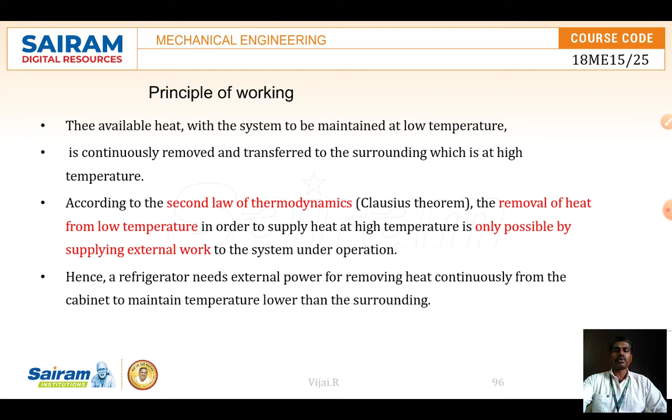So the refrigerator needs an external power for removing the heat continuously from the cabinet, and it maintains the temperature below that of the surrounding temperature. So this is how the refrigerator is functioning. In the refrigerator some important parts are there, the four important parts we know.

One is the compressor, which is used to compress the refrigerant, and then a condenser where the vapor is going to be condensed into liquid, and an expansion device where the pressure is going to be reduced, and an evaporator where the evaporation process takes place, that is, the liquid of the refrigerant is converted into vapor here.

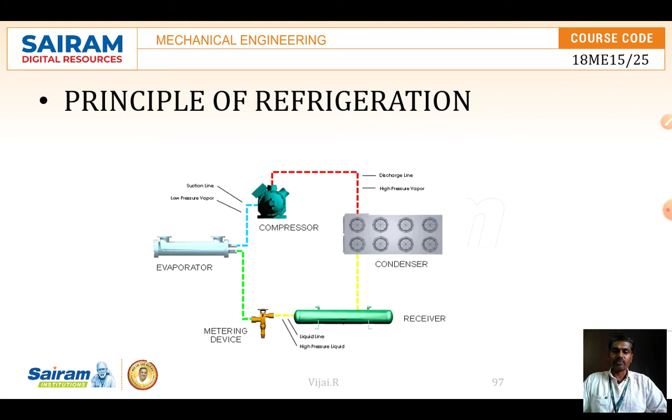So one by one we will see this process. We call it the vapor compression refrigerator. It's one type of refrigerator. How it is going to function, let me see. For this vapor compression refrigeration system, we have four important components. Number one is the throttle valve. We call it the expansion valve.

So throttle valve. Second one is the evaporator. Third one is the compressor. Fourth one is the condenser. So the first one, the throttle valve. In the throttle valve, the pressure reduction process takes place. So it is converted into a low pressure liquid.

In a throttle valve, the refrigerant is going to be converted into a low pressure, low temperature liquid. Once the low pressure, low temperature liquid comes, then it goes to the evaporator. In the evaporator, the low pressure, low temperature liquid passes through a set of coils.

When it passes through the system and through the coil, it absorbs the heat energy in the system, which is the refrigerator system, and it becomes vapor. So we call it the evaporator. The evaporator is the one where it is going to convert into a vapor. Then the vaporized refrigerant passes on to the compressor.

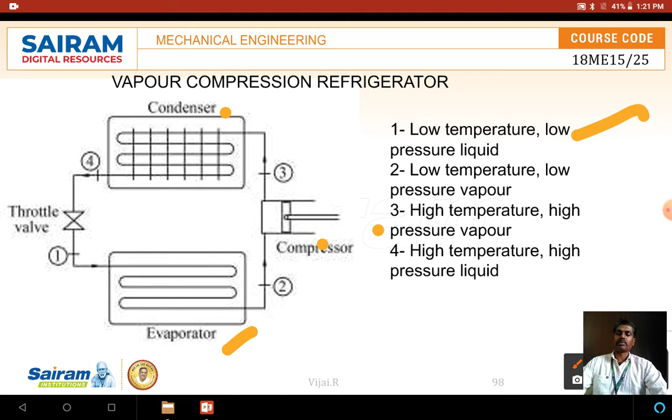The function of the condenser is to condense the vapor and convert it into a liquid refrigerant. So these four important things are there. How it is going to work, we will see in the next slide one by one: what is the use of the expansion valve, what is the use of the condenser, how the compressor works, and the function of everything.

So in this slide, we can see that a vapor compression refrigerator has mainly four components: evaporator, compressor, condenser, and the throttle valve. So the evaporator has a low temperature liquid. The evaporator is the area where we keep the materials, as in the fridge, and there a coil is passing. Through the coil, the low temperature, low pressure liquid is passing into the refrigerator chamber.

So when it passes through the chamber, through the set of coils, it absorbs whatever heat is inside the chamber, okay, and it takes the heat and changes into vapor. So the evaporator is used to evaporate the liquid refrigerant. So while coming out of the evaporator, it becomes low pressure, low temperature vapor.

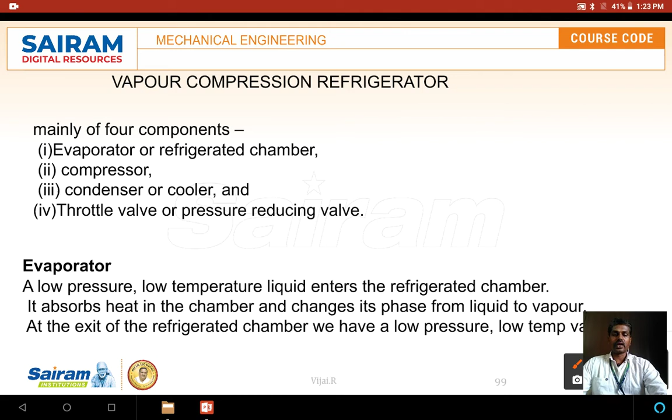Right. Next, the compression process. You can see what is happening in the compression. In the compression process, the low pressure vapor coming out of the evaporator goes to the compressor, where it gets compressed. Since the refrigerant vapor is now in the gaseous state, it goes into the compressor. In the compressor, compression takes place, raising the temperature and pressure.

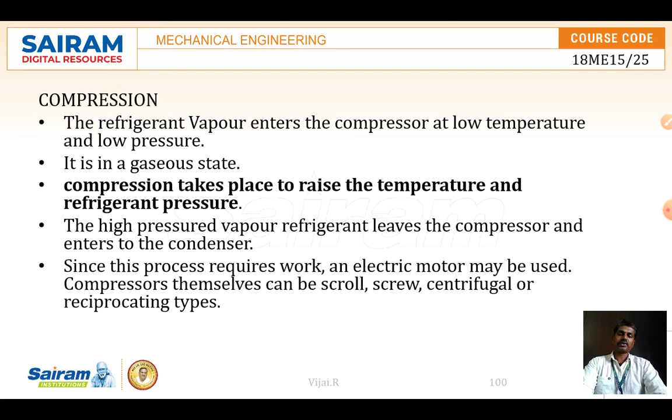So this high pressure vapor then leaves the compressor. It enters as a low pressure vapor, and after compression, it becomes a high pressure vapor and leaves the compressor chamber. For compression, we need to connect an electric motor, so that it will be useful for the compression.

Then it goes to the condensation chamber, where condensation takes place, that is, the refrigerant releases its heat to the outside environment. Once it loses all the heat to the atmosphere, it changes phase from vapor to liquid once again. So at the entrance, it is a high pressure vapor from the compressor. After it releases its heat to the atmosphere, it becomes a liquid. So now it becomes high pressure liquid at the outlet of the condenser.

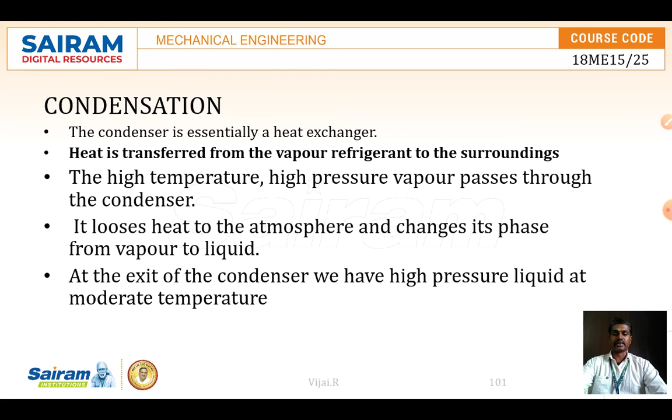Once it passes through the condenser, it goes through the throttling and expansion valve. The liquid passes through the throttle valve, where it suddenly expands to a low pressure. So before going to the evaporator, it reduces the pressure and becomes low pressure, with a sudden decrease of the temperature due to the decrease in pressure. So now we have a low temperature liquid, which again goes to the evaporator chamber.

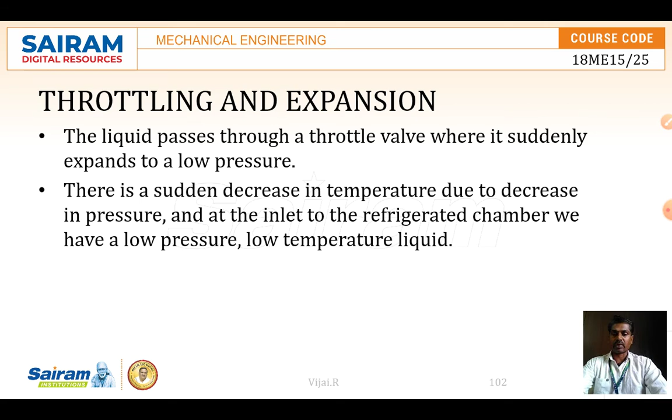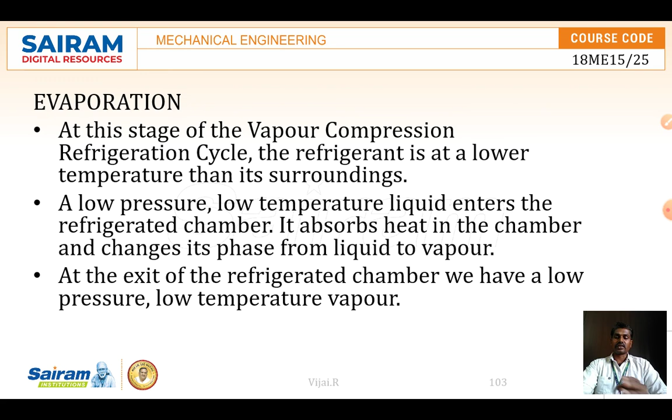So this is the cyclic process. After the expansion valve, it goes to the evaporation chamber, then again it absorbs the heat from the chamber. So this cycle carries on: evaporation, then compression, then condensation, then expansion valve. This entire cycle is what we have in a vapor compression refrigeration system.

Once again, we will see this diagram. When it passes through the evaporator, it absorbs heat and becomes vapor. That vapor goes to the compressor, gets compressed, and is sent to the condenser. In the condenser, it is converted again to a liquid. That liquid passes through the reduction valve, that is, the throttle valve, and the cyclic process goes on. So this is how a vapor compression refrigeration system works.

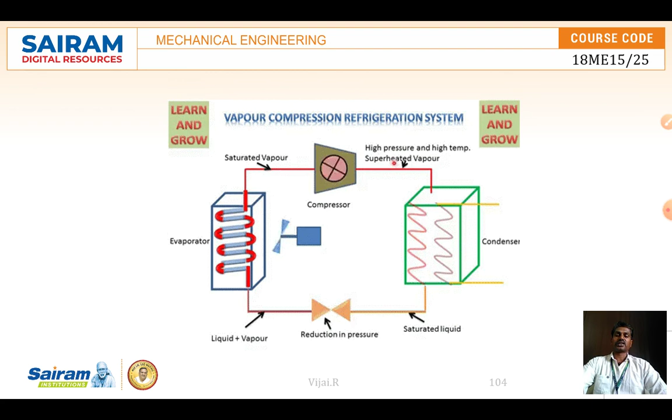In the next video, we will see about the vapor absorption system and how it works. So thanks for watching.